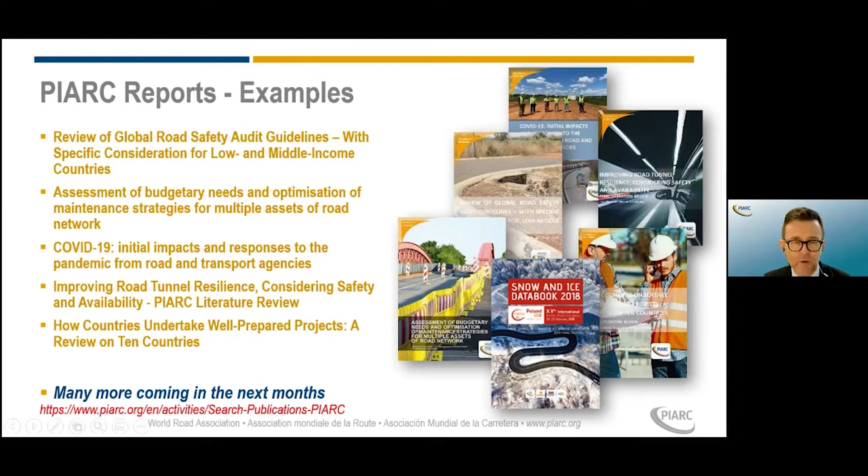All these reports are available from our website, and on average we publish about one report per month. That's an average, but it gives you an idea of how many reports you can find on our website. We also have online manuals.

These are actually websites focused on road safety and asset management, which I think could be interesting for today. They were updated in 2019 and are very easy to use—you can check them from your smartphone if you want. They're presented in a way that's easy to understand, and they're not just one report, but a gateway or portal to lots of nicely structured knowledge. There's also software such as HDM4 and QRAM to help manage the transportation of dangerous goods in tunnels.

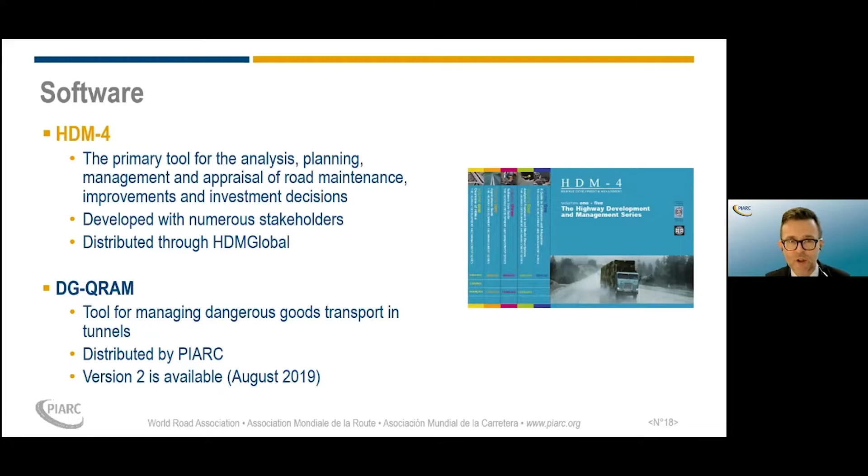This is also us—as you may see from our website, we have hundreds of reports available. That's a lot, but we need to continue, because roads and road transport keep improving. In many countries, roads represent about 80% of all inland transport, and they're really the gateway to remote or rural regions in particular. In urban areas, roads are needed for cars, buses, car sharing, electric vehicles—all these fashionable transportation modes mostly require roads.

This is why we at PIARC believe roads are key for equity, inclusivity, and accessibility. Roads are ready to support many sustainable and low-carbon developments, and roads are here to stay—they're not going to disappear. This is why we keep working to improve roads.

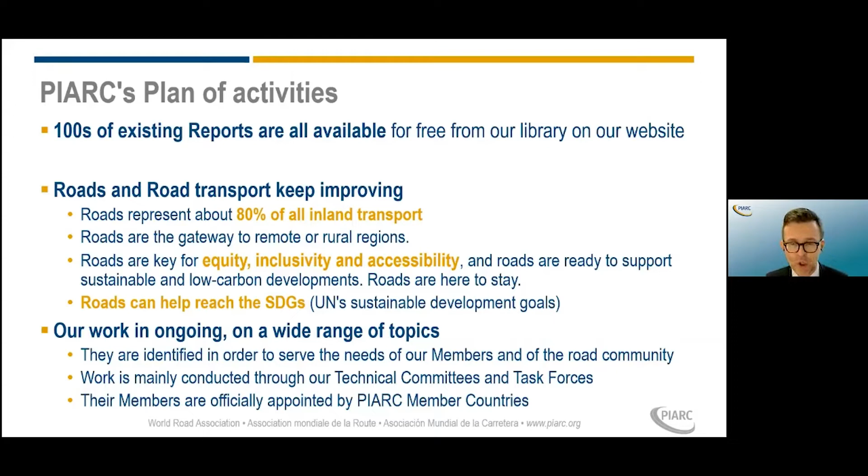We identify a large number of topics to serve the needs of our members and the road community. The work is conducted through our technical committees and task forces, as I was presenting, and the members of those task forces and committees are officially appointed by PIARC member countries. So we are very open, but very focused on serving the needs of our members, particularly our member governments. We develop a work plan covering four years; this plan is quite detailed, as you may see from our website, but it also reflects global trends, including trends that go beyond roads.

For the 2020 to 2023 period, including today, those cross-cutting issues include climate change and resilience, which are very relevant for the seminar today, tomorrow, and the day after, as well as road safety and innovation. This is the picture of our strategic plan. Winter service is here, but you may be interested in many of these other topics—maybe not today, but for a future seminar.

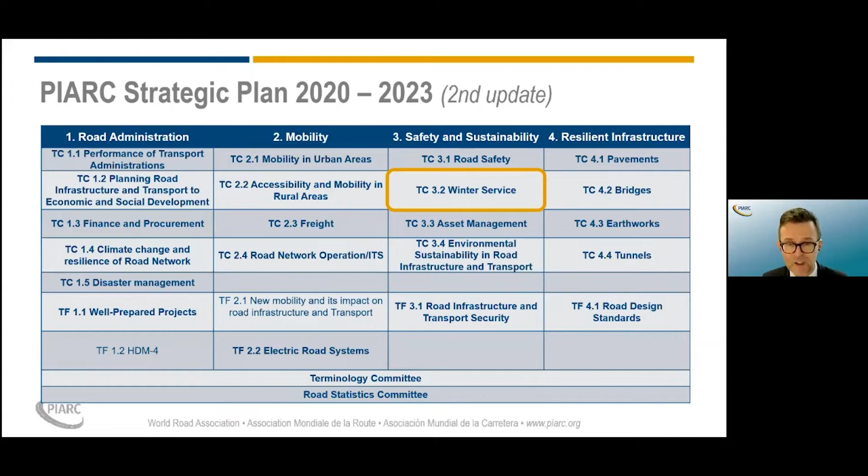So winter service is really well positioned together with asset management and road safety under the umbrella of safety and sustainability. This committee is led by a colleague, Nutz, who will be presenting as well and who is even moderating this seminar on PIARC's behalf. Together with his team, he's developing a large number of knowledge products and reports and organizing a congress, of course.

Some of us have asked PIARC to work on COVID. We did that. We published a report about a year ago on the impact on roads. The world, I would like to say after COVID, but it's continuing, the impact has been very significant. But we should not forget that we still have to address all societal challenges to reduce the carbon footprint of transportation, to help fight extreme poverty, to improve access and mobility for all, and to increase road safety. So we have to mix the impacts of COVID, such as digitalization, with all these policy objectives, and we help our member countries make policy choices that combine all these aims.

This is why it's important to continue sharing information. What you are working on in Ukraine is probably very interesting for Argentina as well, and vice versa. So this is why PIARC exists, to help you colleagues meet and share your ideas, maybe share your issues or problems as well.

We organize lots of events, such as today's event. We have many other planned, as you can see. Just last week, we organized a seminar on climate change adaptation with Uganda. In March, we will organize another one on rural areas with Paraguay. Also some conferences, such as the Symposium on Pavement Characteristics and the Conference on Tunnels Operations and Safety, which will take place in September and October next year. And a bit later, further down in 2023, the 27th World Road Congress, which will take place in Prague in the Czech Republic. I hope we will see lots of colleagues from Ukraine there.

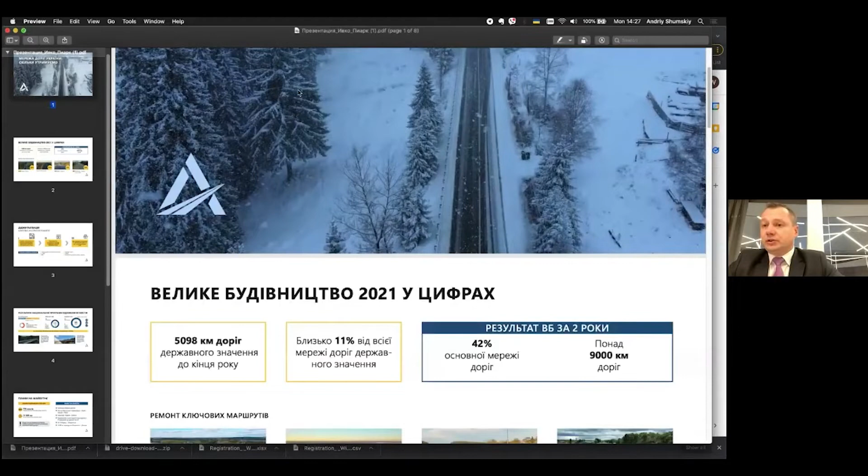With regard to maintenance in the winter, we are able to see the presentation. So the infrastructural issue is one of the biggest areas of the economy in Ukraine, and the well-being of many people depends on it, as well as the competitiveness of the country in general at the external markets. So today I will be able to share with you the way we operate, where we're moving, and what are the plans, and what has been done over the last year and this year so far.

So you see the slide. Ukraine has...

Ukraine has three different types of roads: municipal roads, state roads, and local roads. The state roads has about 170,000 km, 47,000 of those are international roads and national regional roads and territorial roads. So we have 123,000 km of roads of local importance, and we have regional and village roads.

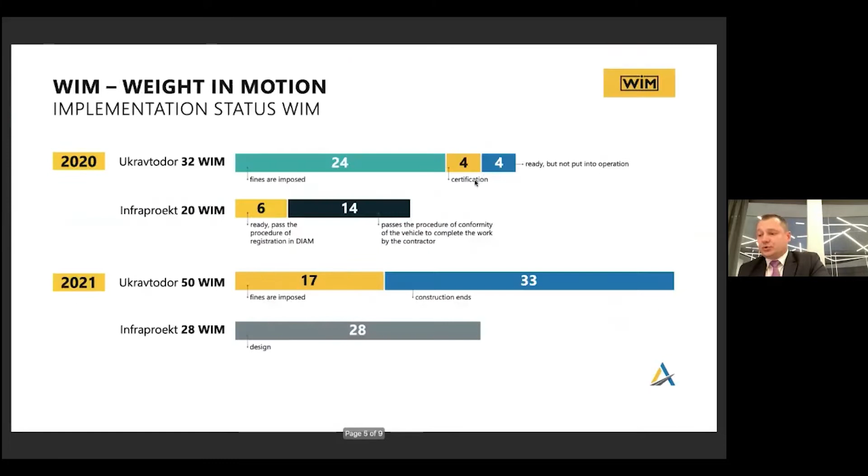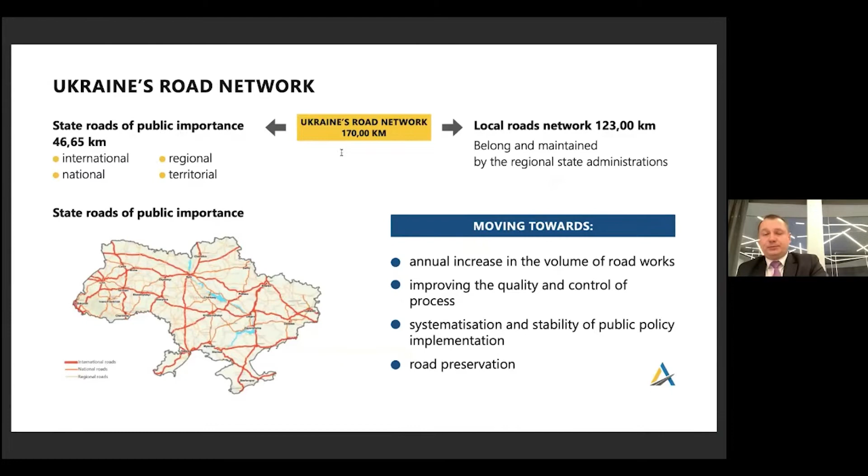Over the last year, we were able to restore 213 artificial structures in 55 [locations]. This year, we had plans to restore 160 artificial structures, their restorations and construction. We're talking about bridges and roadways.

So far, we were able to build 300 of those, 50 within the framework of the maintenance program and 250 according to the national program. The bridges that were built include the bridge through the Luchka River and the road bridge to N01 road.

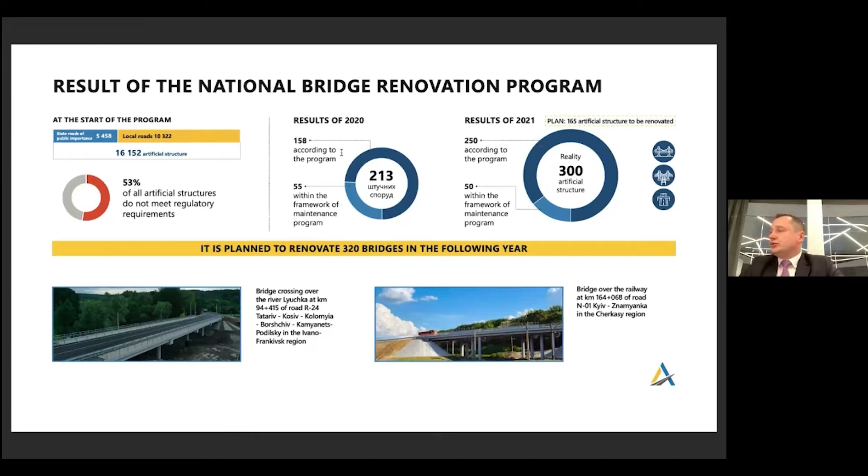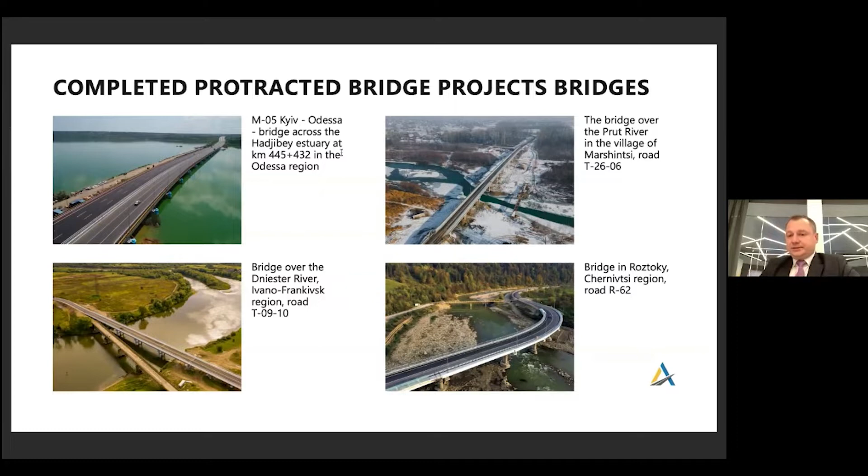Next slide, please. For the future, these are the plans. We hope for the next several years to complete 770 new bridges and 15,000 kilometers of motor roads. Our primary direction will be working with the Kiev Ring Road.

Last week, the procedure for bidding was announced, so we're in the process of bidding. When the subcontractor wins the bidding procedure, we will move toward construction of the ring road for the Kiev area.

Also the commercial road, 280 kilometers, Krakovets-Brody-Rivne. The substantiation documentation is being prepared and will be filed by the end of the year. Then we'll have 2 more months for approval, and this will be a concession road planned to launch in the nearest future. Kharkiv-Dnipro.

This will be a very important connection between 2 major cities. Also construction for M24 to lead to the border with Hungary, and then M14 Odessa-Mariupol. And then we'll continue this road to the places where it's not reaching out yet.

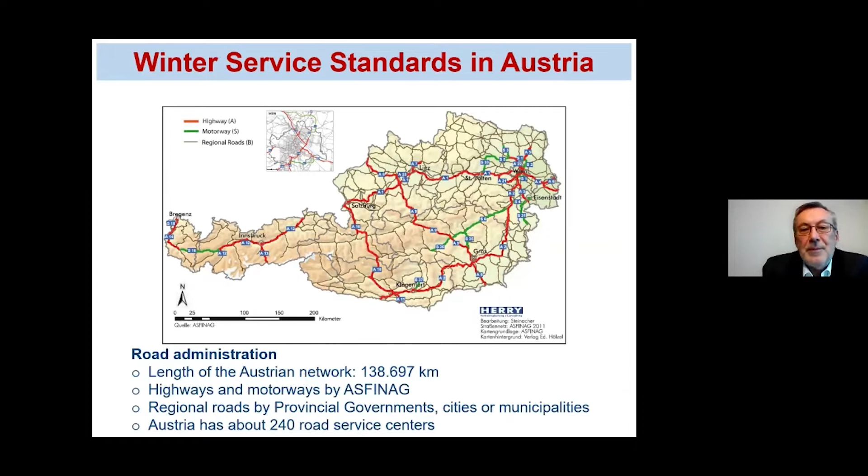You can see the road network here. The largest network is municipal roads, and the smaller but higher-category network is highways and motorways managed by ASFINAG. All of these are salt spreading routes for winter service. For other routes, it depends on the amount of traffic.

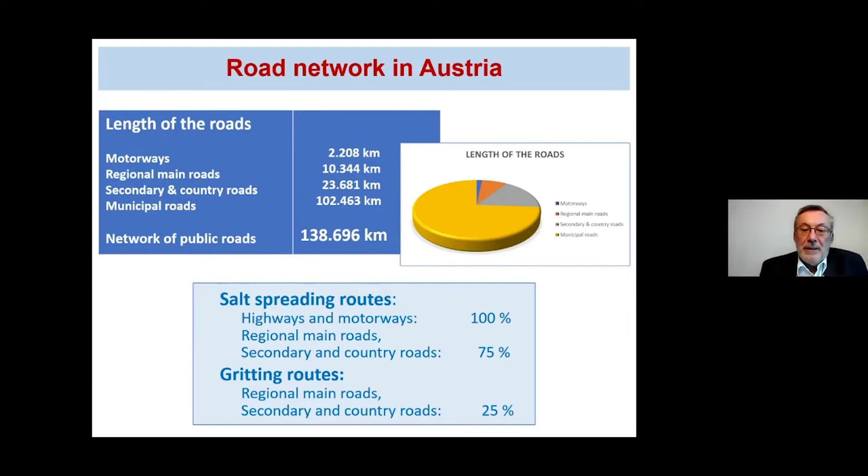Gritting material is also used in Austria. As I said, motorways and federal highways are administered and operated by ASFINAG, a private organization that earns money from road use. The national roads are administered by the Austrian federal states—we have 9 Austrian federal states—and they are responsible for the road network in their state. The municipality roads are administered by the cities or municipalities themselves.

The legal requirements for roads in Austria: we have the Austrian General Civil Law, the ABGB. There is paragraph 1319a, liability of the keeper of the road, and this applies for both summer and winter. If a person is injured or something is damaged because of a defective condition of a road, the person responsible for the proper condition is liable. This means we have to do winter service, and we are responsible—whoever is the owner responsible for this road or way.

Then we have in the road traffic regulation a paragraph on duties of the residents. Residents also have to do winter service in front of their houses. It says that in the local area, residents must clear the sidewalk along the house from 6 o'clock in the morning to 10 o'clock in the evening and grit it in case of icy conditions. They have to do this work themselves, or if they can't, make a contract with someone else who does it. If there is no sidewalk, the roadside must be cleaned and gritted in a width of 1 meter in front of the house. So residents also have to do winter service.

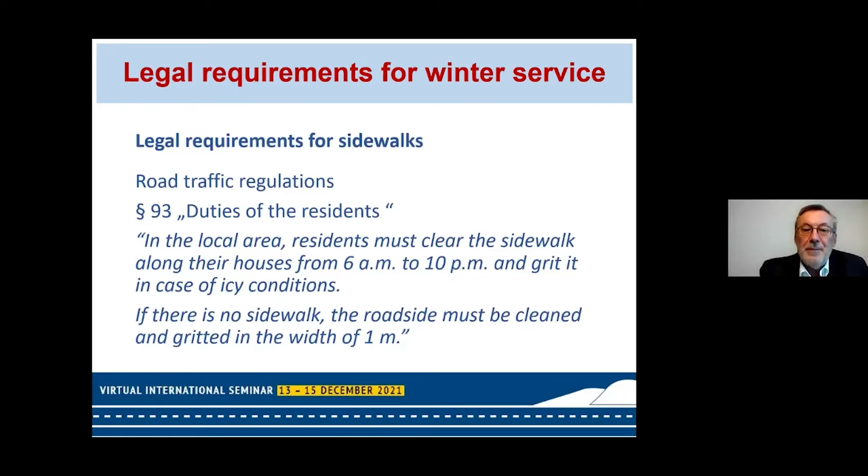Definitively, what is to be done for winter service? We have technical standards—papers done by the Austrian Winter Research Committee, where Peter and I work in this group. There are general definitions, and the main document is on snow clearing and gritting, explaining how to organize winter service, what to do with snow clearing, what to do with gritting, and what personnel tasks are involved. There's also a separate document for snow fences in regions with heavy snow drifts, a technical standard for a road condition information system, and a paper about minimizing environmental impacts.

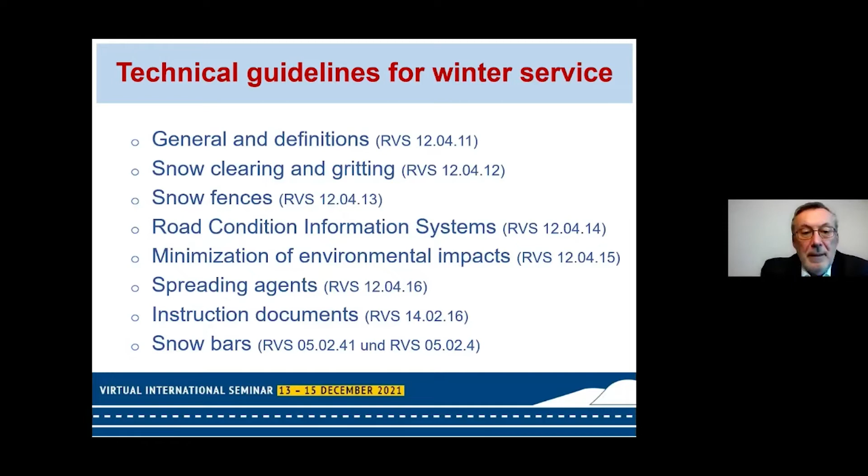This is adapted to the latest research, especially regarding environmental impacts from de-icing agents. There's a paper with standards for spreading agents, which includes gritting material and de-icing agents, incorporating the relevant European standard. There's also an instruction document for new people introduced to winter service, and two small papers about snow bars—how they are built and how they must stand along the road.

What are the winter service standards in Austria? For highways and country roads we have 4 different categories, depending on the amount of traffic. The highest category A is for highways and express roads, where winter service must be done around the clock.

The cycle time is a maximum of 3 hours. That means within a maximum of 3 hours, the snow blower or spreading car must be ready to start the next round. That's a minimum standard.

We have highways with a cycle time of about 40 minutes, and high-level country roads with about 5,000 vehicles per day (ADT) at a cycle time of 5 hours, with winter service done from about 4 o'clock in the morning to 10 o'clock in the evening. That's the minimum standard, and whoever is responsible for winter service has the opportunity to order a winter service around the clock in such situations.

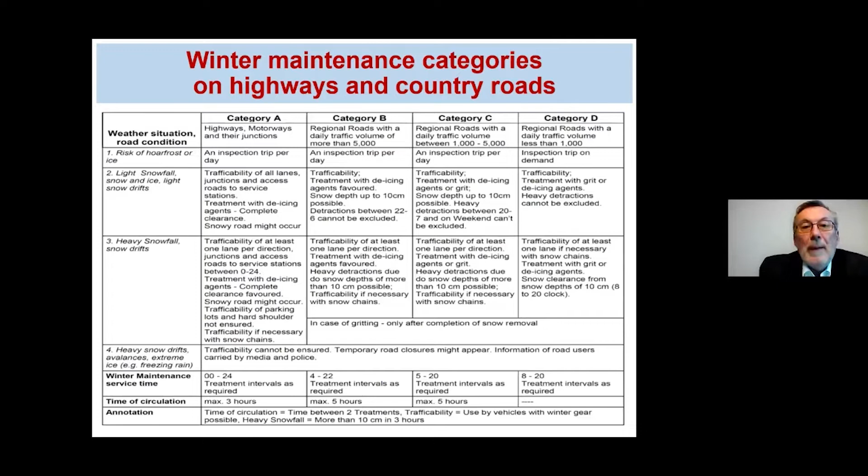This table is written down to show what they have to do in category A. The left column shows the weather situation: light snowfall, heavy snowfall, snowdrift, avalanches, extreme ice, and freezing rain. It shows what the winter service station has to do, and also the winter maintenance cycle time is inside there. That's all for highways and country roads.

For urban areas, for cities and municipalities, we have standards with 7 priorities. Priority 1 is the highest, for inner city main roads, going down to priorities 4 and 5 for cycling lanes, which also have winter service done. The last ones are priority 6 for sidewalks, and priority 7 for parking areas.

Also for different weather situations, the standards are written down for what the winter maintenance station has to do as a minimum in cases of slight snowfall, heavy snowfall, and so on.

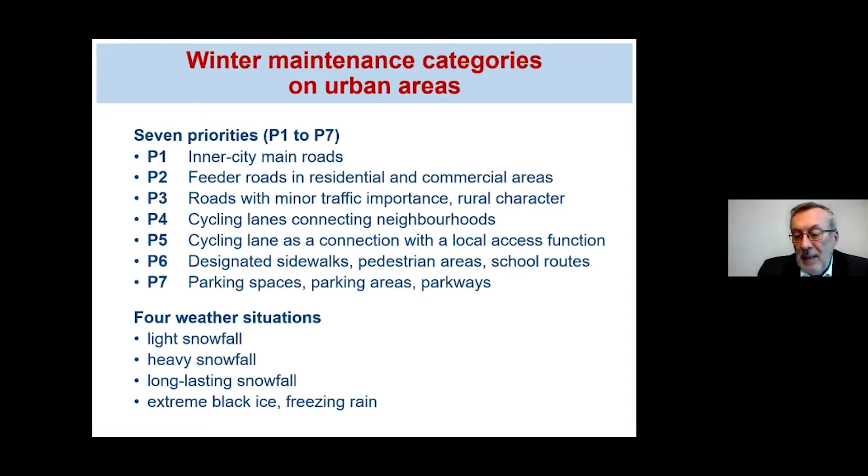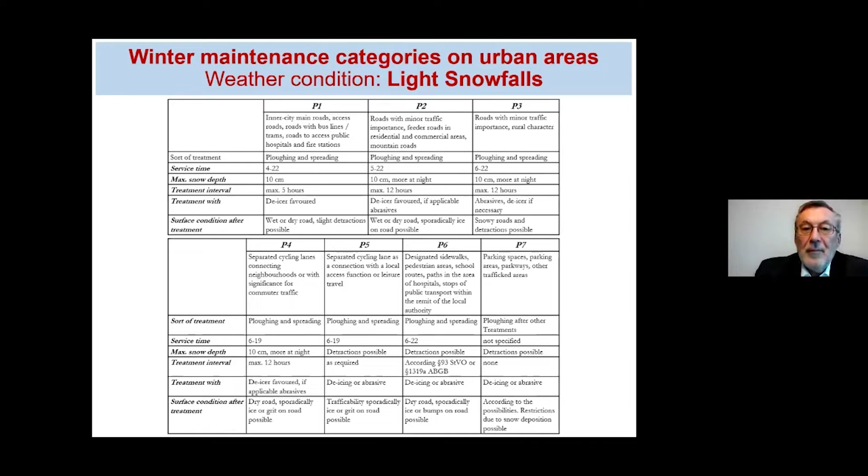In Austria, we started 10-14 years ago with winter service research projects. The first was to optimize pre-wetting salt application. The pre-wetted salting standard was FS30, 30% brine and 70% dry salt.

We asked in Austria what we could do with other brine amounts, like 50% or 70%, and had a research project with the Technical University of Vienna, where Peter Nutz works and also worked on this research project. We found new spreading methods with other amounts of brine, and wrote new spreading sheets.

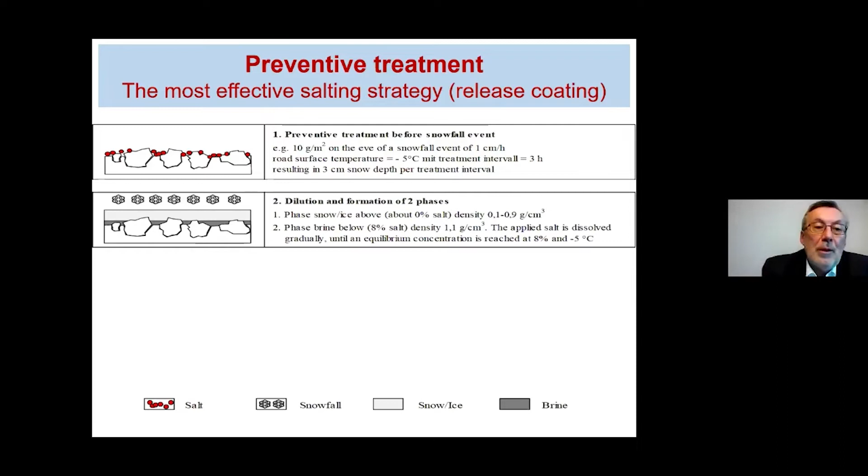They built a release film on the road surface so the snow cannot freeze on the road surface, and you can work well with a snowplow. Here's the next picture.

You build the film on the road surface, and you can clean it and spray it again, and do that as long as the snow is falling.

Because of this research project, our spreading machines were changed, because we need more brine tanks on our trucks. The first step was additional brine tanks, because we spread more brine and less dry salt, since we see that the residual salt on the road surface is higher if you use more brine.

In the picture, on the left side down, you can see the spreading pattern with only brine spreading on the road surface. It's possible on country roads, it's no problem, you need no nozzles.

We can reduce salt consumption: FS50, called 50% brine and 50% dry salt, to FS60 with 60% brine and 40% dry salt for 20% reduction, to FS70 with 70% brine and 30% dry salt for 40% reduced salt consumption, compared to the former standard FS30 with 30% brine.

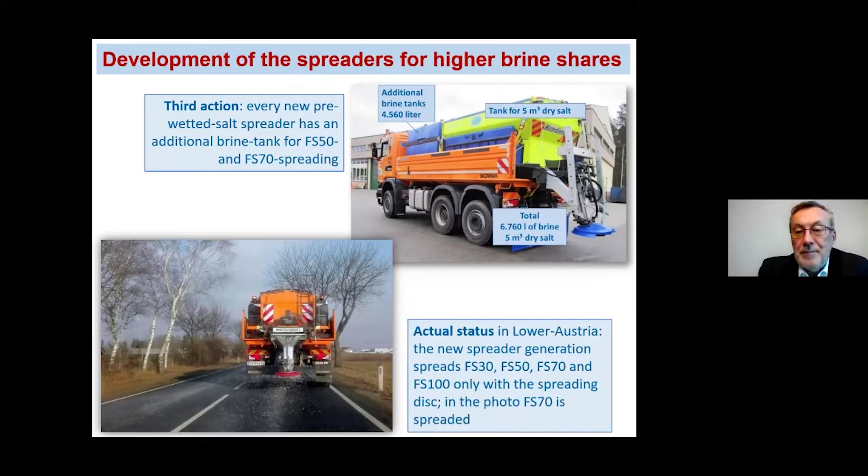In Austria, we have also compared salt spreading especially for this chart. You can see how much salt is used by an organization per lane kilometer on a salt spreading day, and how much they use. We compare the 9 different federal states and also ASFINAG, the private organization responsible for the highways and motorways, showing how much tons per lane kilometer they use.

It's a good instrument to optimize your winter service. When we discuss what you did, we also compare how much brine the different organizations use. And within the federal states, at the maintenance stations, we have charts comparing different maintenance stations in similar climatic conditions.

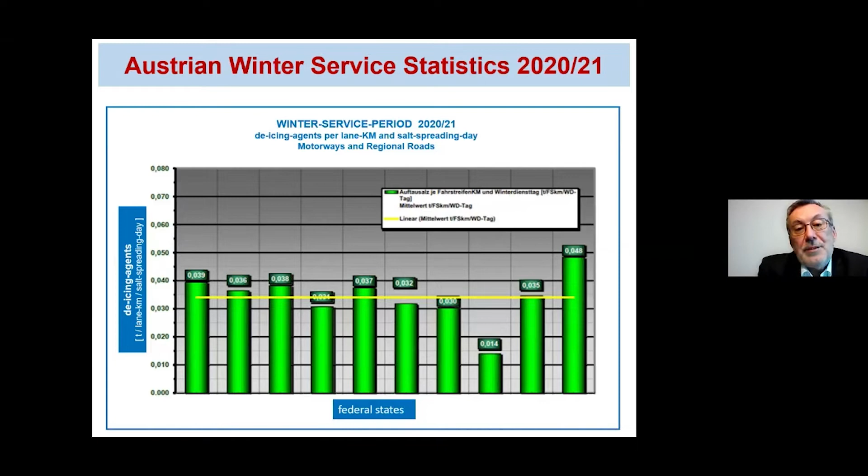So thank you, I was able to present the standards in Austria, the rules for winter service within Austria, and what we are working on with research projects to optimize our winter service.

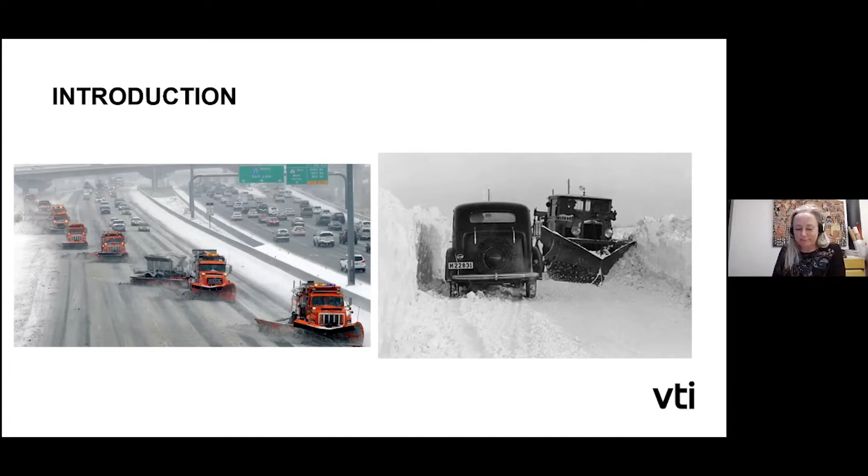Nowadays it looks a little bit more like this, this is from the US where the big parallel cleaning goes on. And then we have digitalization, but we still don't have apps that can do the maintenance for us, though they could actually be of good help.

It started out in the 70s with the road weather information system, with stations around the roads placed in cold spots or more extreme positions. They were measuring temperature, wind and precipitation, and the operation manager had to call out to each station to see what weather was at the moment.

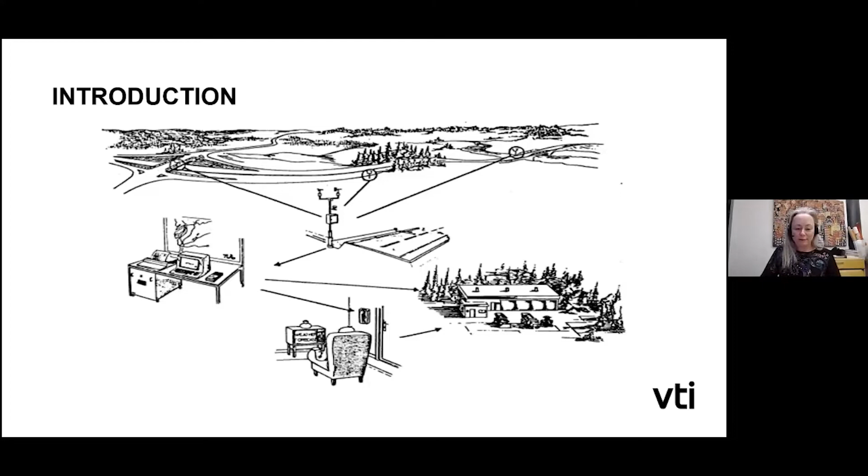Now he can get all this information back to his phone or computer in the office, and he has a lot of different other sources to use to get weather forecasts, temperature, precipitation, road conditions, friction measurements, and everything you can wish for. It's there, you just need to organize it in a good way.

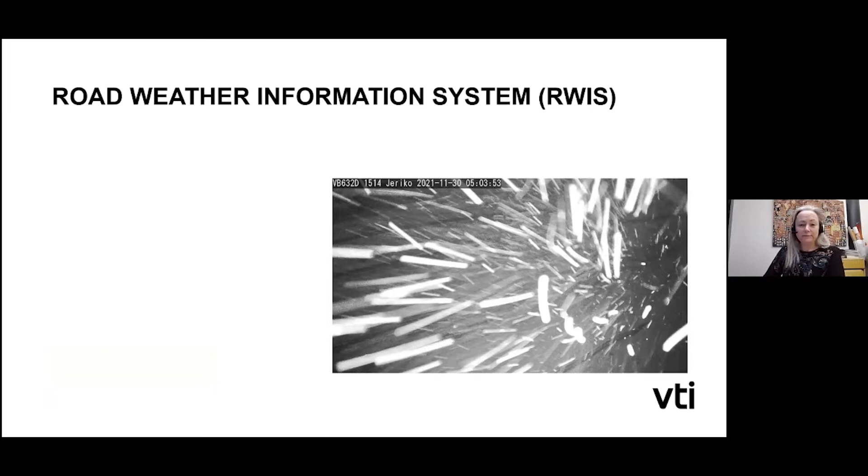We also have connected cars today that can tell the operators or drivers coming behind you warnings if the road is slippery ahead.

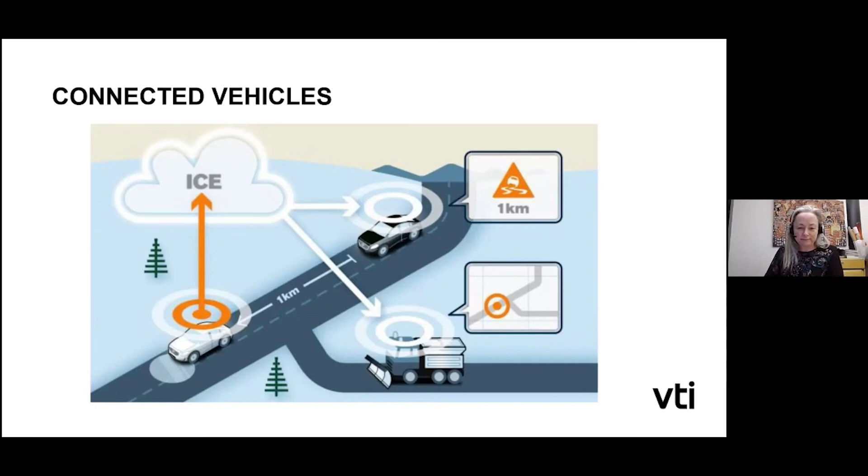This vehicle data can be used both to check if the actions have been done the proper way, for the NRAs to check it up, or for the forecasters to use as help for self-control when they do the forecasts for coming hours. And the forecasts go to decision support systems, and the contractors can use it

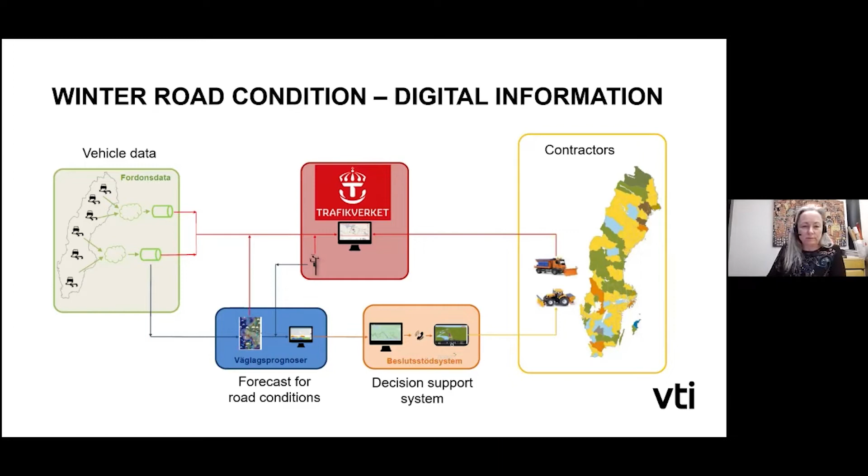to make good prognosis on when it's time to go out and do the actions on the road. The project I was involved in was called Dynamic Forecast Controlled Winter Road Maintenance. We took all different kinds of data and put it together, and I'm going to tell you a little bit about it.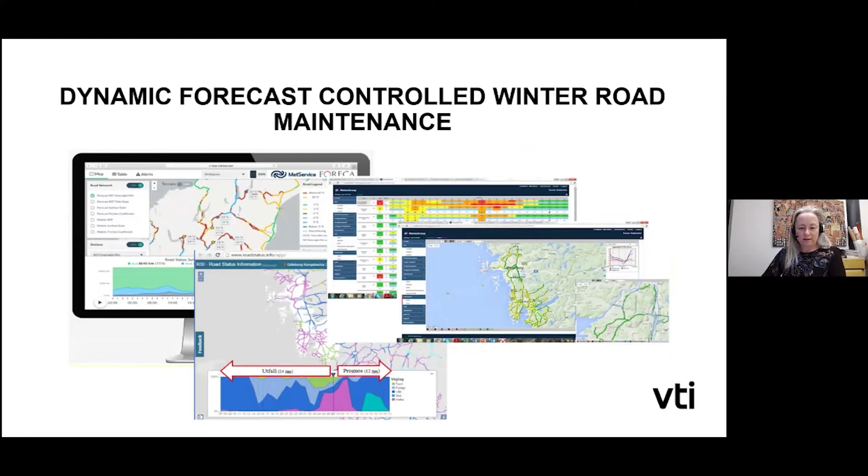We have several road weather forecast services that can provide qualified support for decision makers today. They can easily see forecasts for road conditions, temperature, and precipitation. The service provides a dynamic road condition forecast, and in some cases it even gives proposals for the different actions that's needed on the road.

The main advantage with these systems is that the forecast clearly can show you which part of the road needs to be addressed, and where you actually need the most salt, or if salt is already there from the last time you were out and did your action.

So if we have all these systems to help us, how can we make it easier for the driver and get all this information out to the person driving the truck and doing the salt spreading?

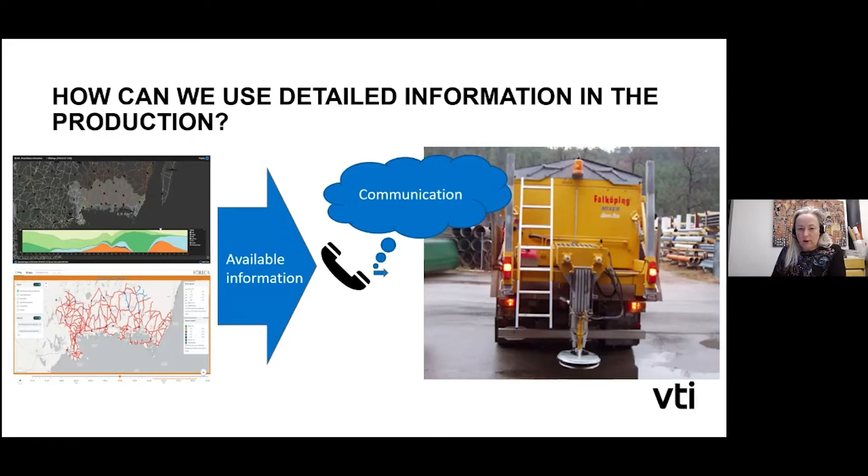This project mostly took care of preventative salting. Plowing and all those things is to come in the future, I hope.

So why do we want to make it dynamic optimization? We want to do it because we can have different weather in different sections of the road, and if we can optimize this, it's gonna get us more money in the end. We're gonna save money in the end.

And today we have a labor market that's very flexible. We have short contracts, increased delivery controls, personnel retiring, and it's quite difficult to get the personnel to work in winter maintenance.

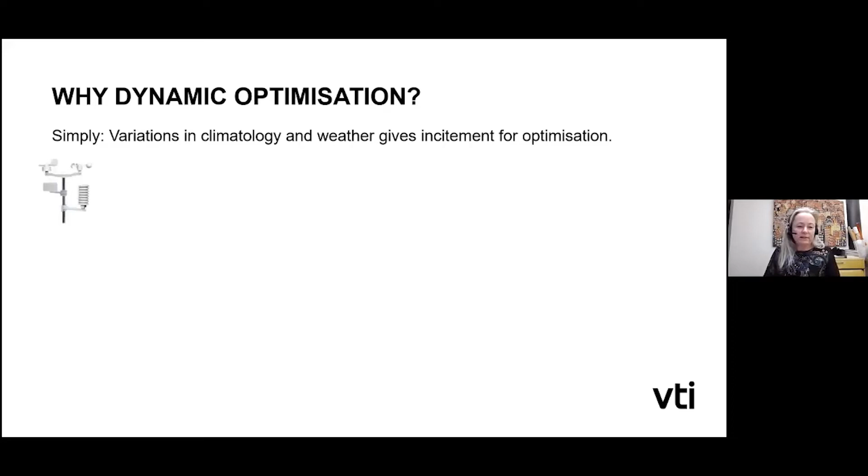So with these new systems, we can actually take the road weather station data, get a bigger picture of it and see how the weather is going to be in 4 hours or so, and plan ahead in a different way.

If this light gray area is the area you need to treat, there are lots of bigger and smaller roads, just as Josef told in his presentation, with different types of roads requiring different kinds of treatments.

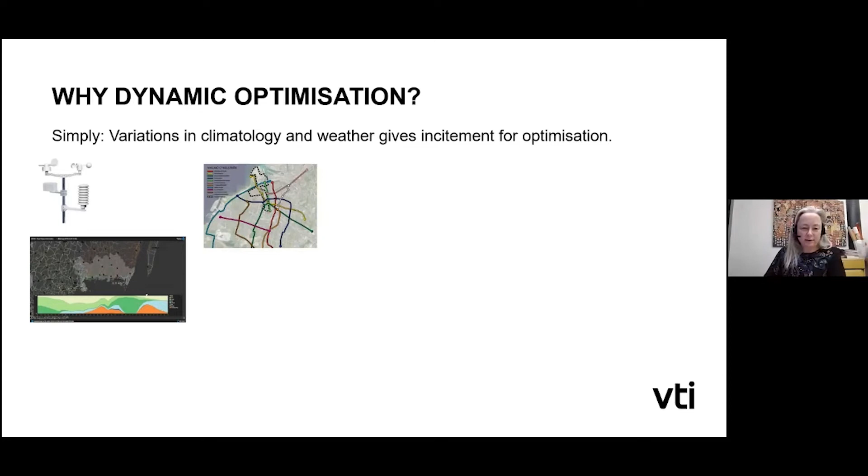If we have a route optimization of this, it could be looking like this, with different cars driving in different colors. Some sections of the road are really complicated to drive.

But if we take all this and put it together, then we know, okay, I have the need of 5 cars or something, then I call them out. I don't have to call them one by one like you used to.

You can use the computer, and the computer calls or sends them a text asking, would you do this route? Can you go out and do your work in an hour? And the driver can say, yes, I'm fine, I'll do that. Then he gets the navigation route sent to his truck, and he just goes to the truck, starts driving, and gets instructions.

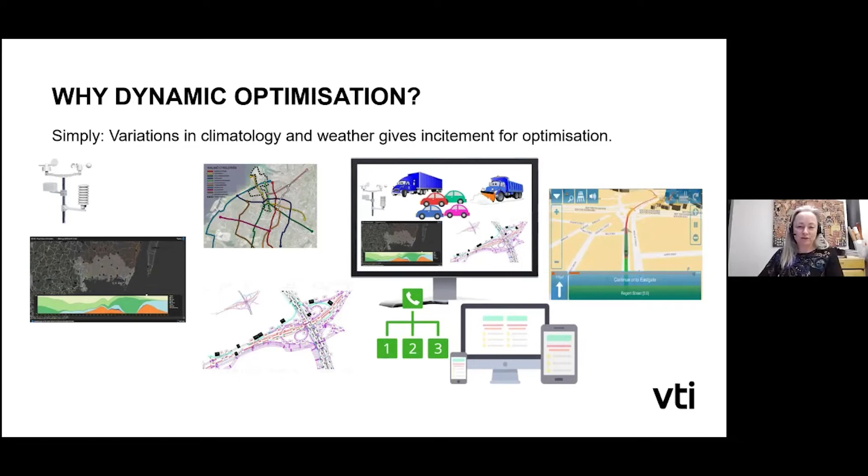The aim of the project was to make the decision making easier for the people taking decisions, integrate data from the weather forecast service into existing GPS management and monitoring systems, reduce the error margin regarding communication between performer and the winter maintenance contractor, and get more productive winter road maintenance with dynamic road conditions through integration and automation, and in the end, a better road.

The project has been in 5 phases so far. The first phase was to try to see if it actually worked to do like we thought it should be done. And the second phase was to implement the project and try to adapt it in the real world.

We started with trying to make the call out, then the call out with a static route. The third thing we did was the call out with navigation on the static route, and then finally, call out with navigation and dynamic route.

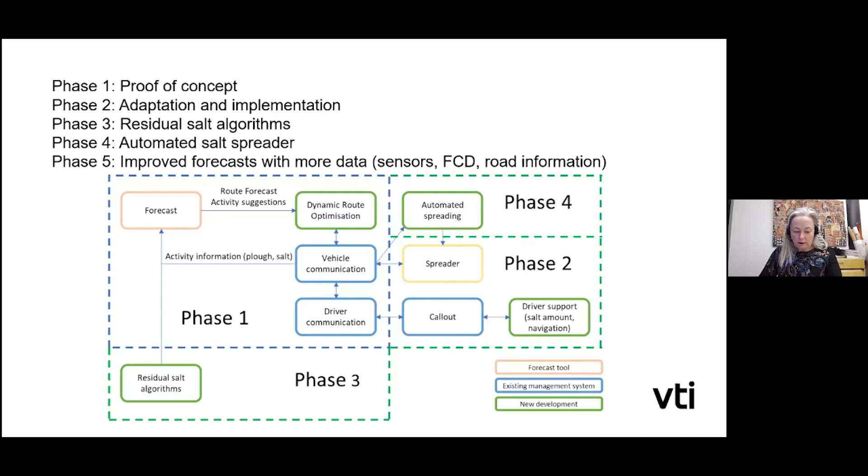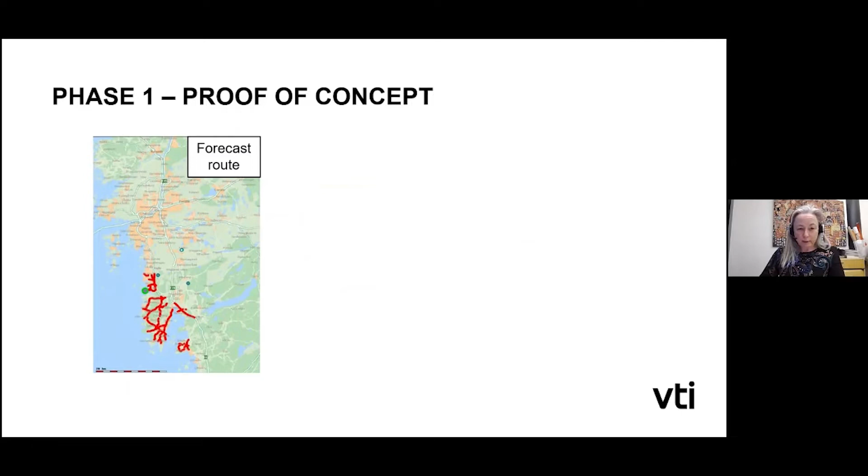This is from phase 1, where we had the forecast. The red is where it should be, where the prognosis says it's going to be slippery, you need salt. We did an optimization with 2 vehicles and got this example.

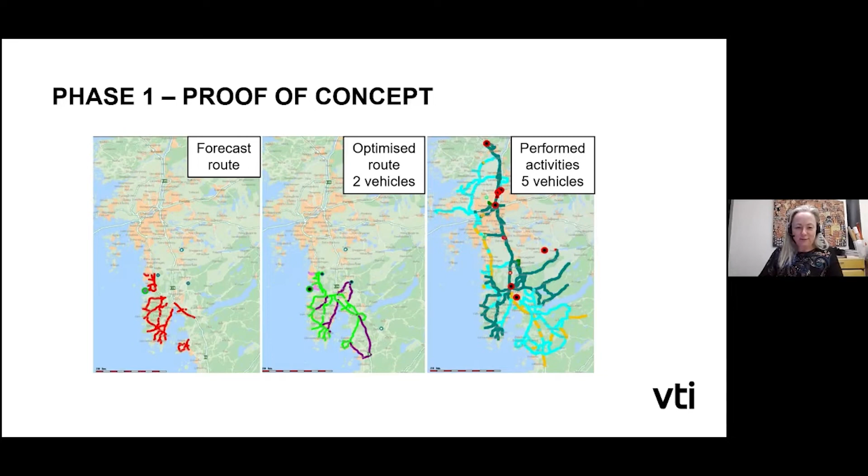So it could have been a lot cheaper than it actually became for the manager this day. But since he didn't trust our prognosis, he did it the way he usually does. Better to be safe than sorry.

And we saw that the concept was working. Calculated reductions in machine hours, reduction of salt and emissions by 15 to 25% throughout the winter season.

This was in 2019, I think. Then last winter we did a verification in a test area, and it actually worked. The numbers were correct when we did it in real conditions.

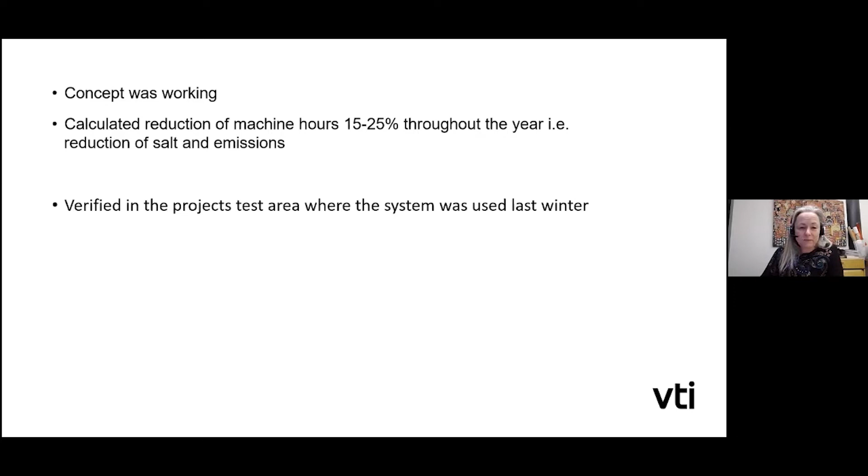Phase 2, here we tried the whole chain from the forecast with the optimizations, with the call out, with the driver saying yes or no. He had a choice. If he said no, we called out another driver. We sent the route to the truck, and he went out on his shift and followed the map he got.

All the functions were working, and the only problem was how good the forecasts are in the beginning. Because if the forecasts aren't good, it could be trouble down the road.

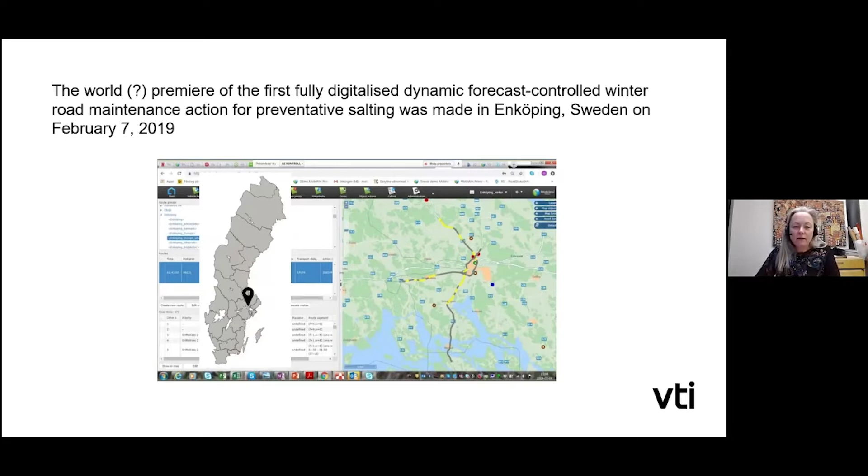For the last few winters, we also did phase 3 with residual salt, because if there's already a lot of salt left on the road, we don't need to go out and do additional salting. This graph shows wet, damp, and dry road, and how many cars the salt can withstand.

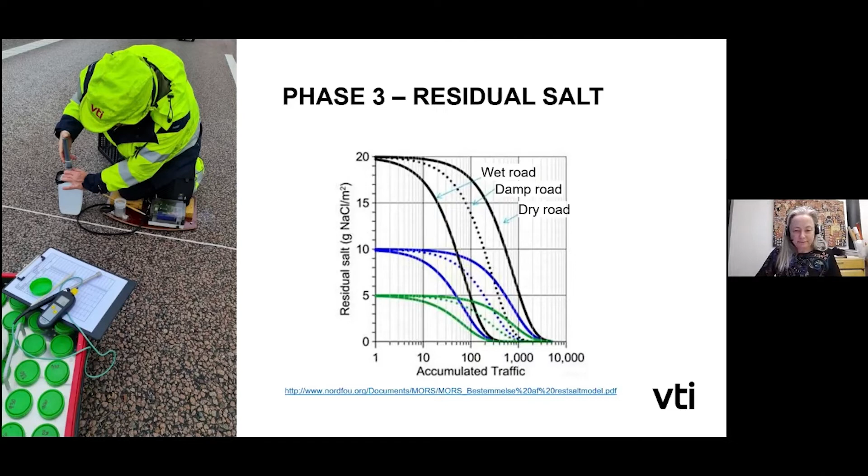We did measurement of salt at test site E18. That's a test area on a highway. We have sensors and road weather stations, and we can measure almost everything in and above the road.

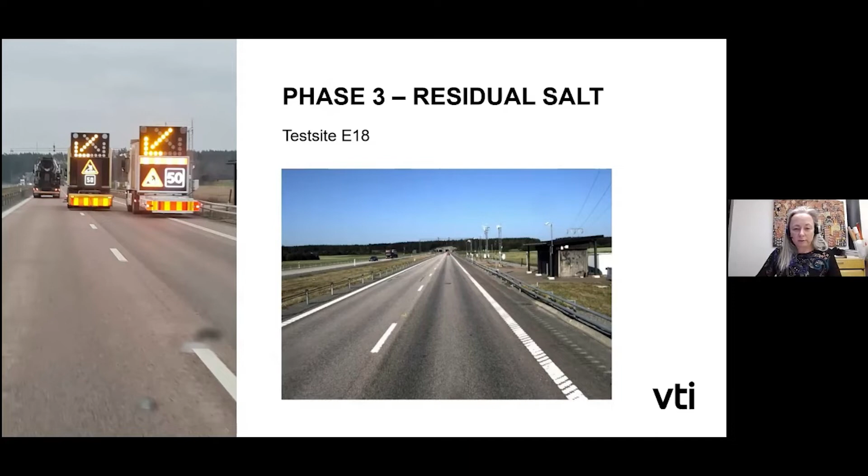Here's my colleague doing salt samples, starting from the edge of the road and throughout both lanes. This was done in November last year.

The day before we were here, there was no precipitation. At the moment he sat there, there was 4 degrees in the air and 6 degrees on the road surface. They had salted in the morning before we arrived.

We used the VTI wet salt sampler, where we have a syringe with a known amount of distilled water. We put it in a cylinder against the road, and the salt dissolves, and we can measure the conductivity in the water. We also take a sample back to the lab to verify our measurements, so we actually measure the correct amount.

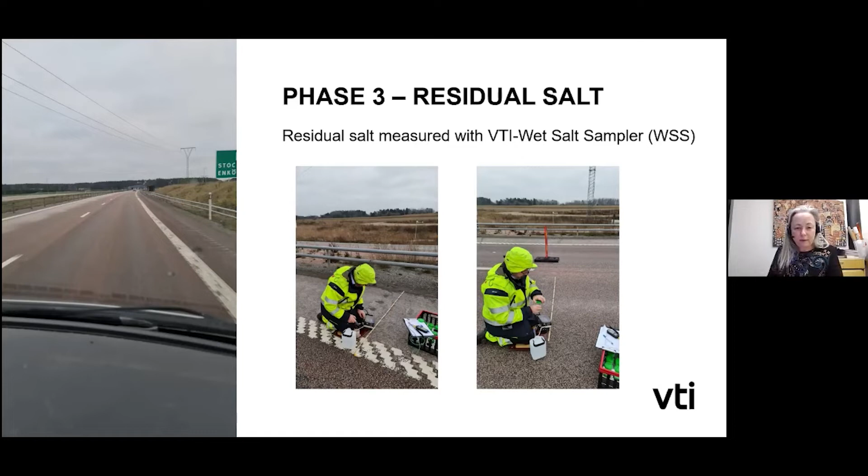This graph is from one of the road weather stations. At 7:15 we salted 12 grams per square meter, so about here, and then around here somewhere we measured salt just next to it. We measured 1.5, I think.

1.5, and the sensor said 0.3. So a little bit of difference, but since we dissolve all the salt on the road, and the sensor can only feel the amount of salt on the sensor itself, and it needs to be in solution, that's the difference between what we measured and what the sensor is measuring. The salt was gone in 4 hours, which is equivalent to what we thought it should be.

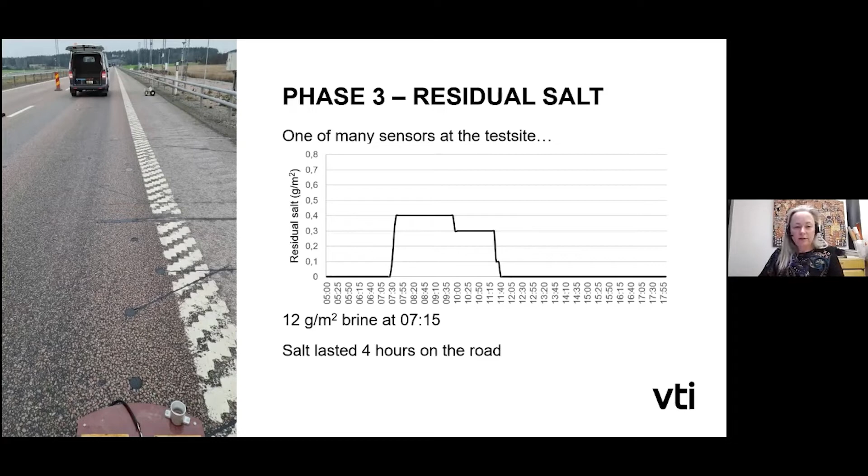We also did modeling with the residual salt model, which was a collaboration with Nordic companies in residual salt a few years ago.

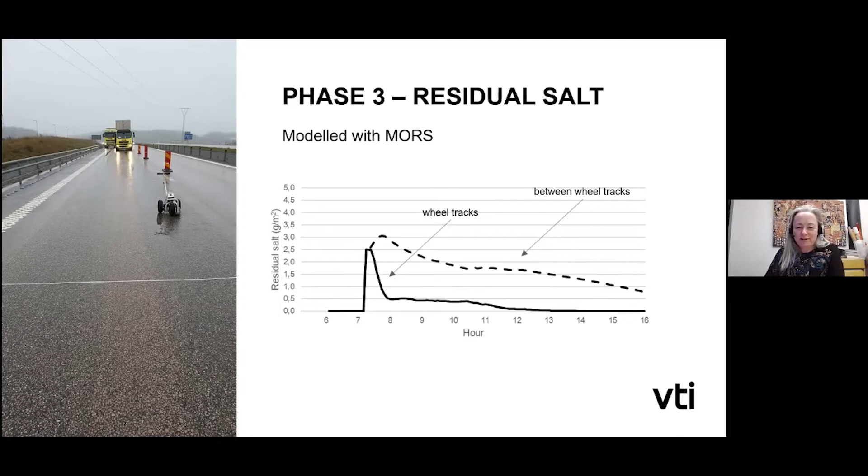I'm soon finished, I see time is running out. Salt spreading - we tried to actually do steering files for the salt spreader as well in phase 4. And it's actually working. When the driver gets his map, the car also gets his information, so the salt truck is spreading salt where it should spread more, less, or nothing. All the driver has to do is drive.

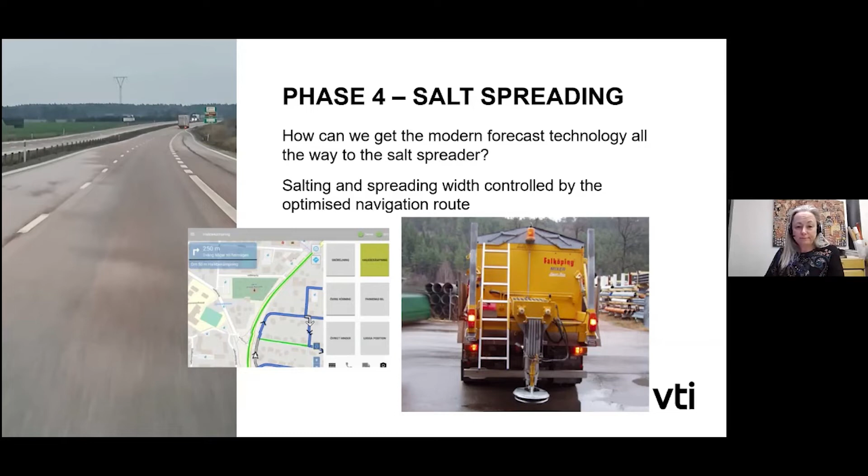And this is actually going to be tested this winter in real conditions, and also this winter will continue with improved forecasts, where the forecasters can get access to more data and do their better road weather prognosis.

Conclusion of this is that this project can be a contribution to decrease salt use, decrease emissions and air pollution, reduce at least a little bit the stress for the drivers, and decrease travel times for the road users.

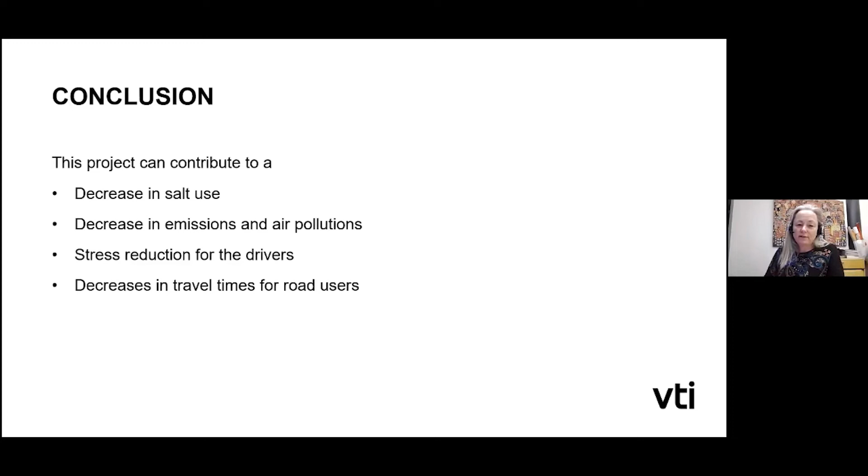We were a few companies in this, and a few contributors of money for fundings.

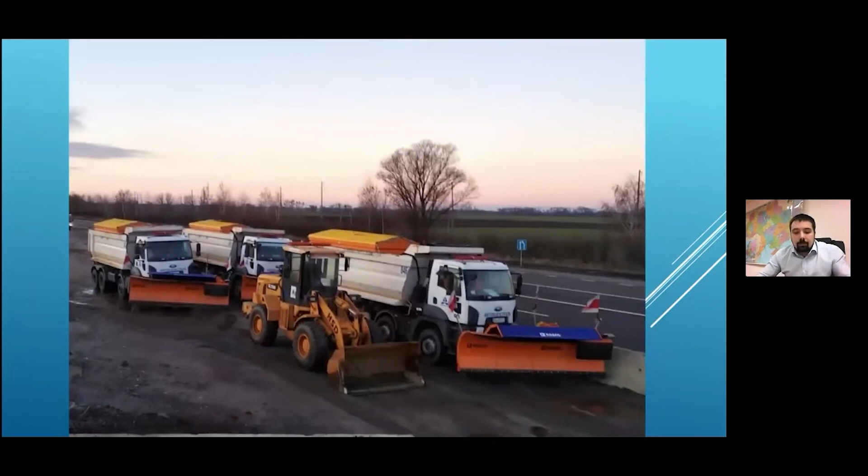Maintenance is a big complex of works. During the winter, it's road cleaning, salting, snow plowing, and implementation of passive road snow blocking techniques.

Using snow plows is very effective to prevent snow buildup. In case of ignoring these works, the snow can build up, and in order to alleviate the snow buildup we need to use rotor snow plows. So we use the whole range of necessary techniques and machinery.

Snow plows are used together with rotor snow plows. In order to clean the road, we also use excavators and loading machinery. All this machinery is most effective at bus stops, rest platforms, U-turns, and also at parking lots.

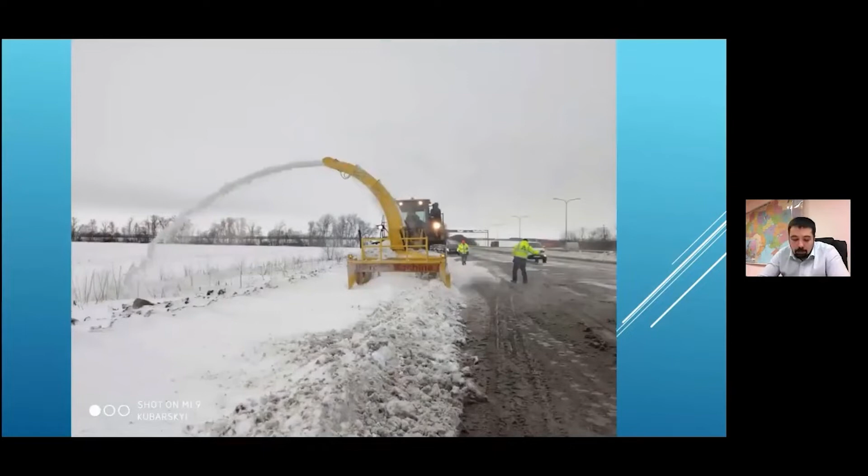During the spring and warmer season, we maintain the road cracks and potholes. We fix the fencing, install the road signs, and may perform other road works.

During the winter time, our Maestral Pivden company is performing all the emergency road maintenance.

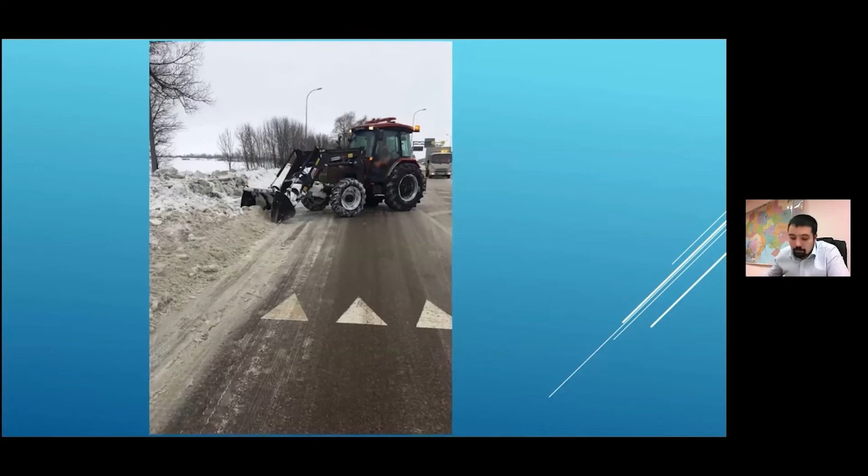We're able to use cold concrete of up to 5 centimeters thick. If necessary, it's done in 2 layers. If we have a steamroller, this compaction can be done in one take.

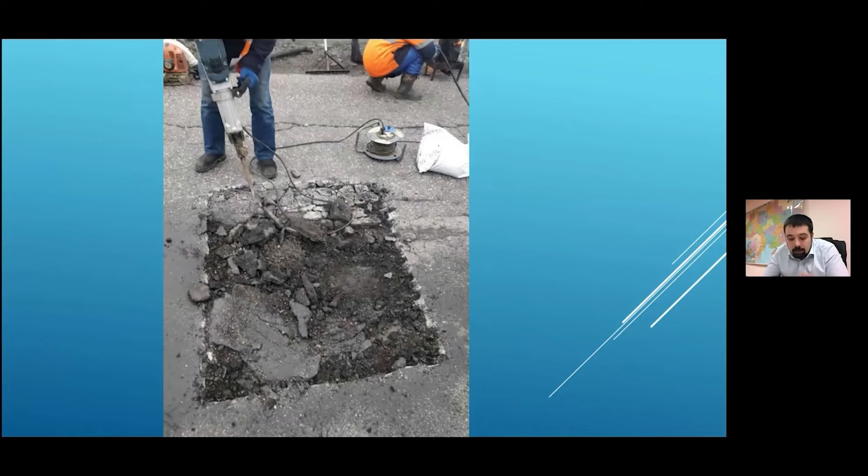The recommended footage is at least 2 square meters. The edges of the prepared block have sharp, deep edges, and we also use the technology of liquid asphalt concrete.

This is a new material used with pouring techniques with bitumen and different grade rock. Asphalt is transported in mixers like these that provide for mixing of the necessary components in the necessary proportions. This is a very liquid material, flowing at 220 centigrade.

In the process of application, the material becomes solid and very resistant to any physical impact. We use modern day materials and methods to fight ice.

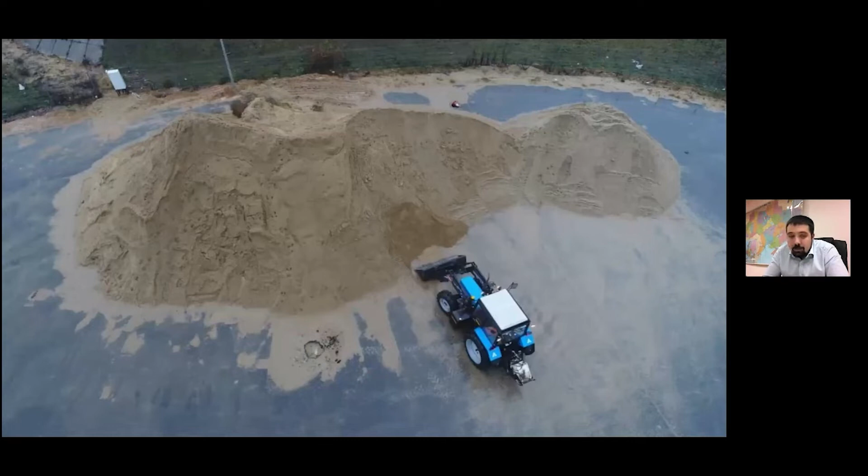We transport salt, so use of salt technologies compared to saline solutions in mix will be able to help us save on time and save on costs, and will provide for better transportation regardless of the weather conditions.

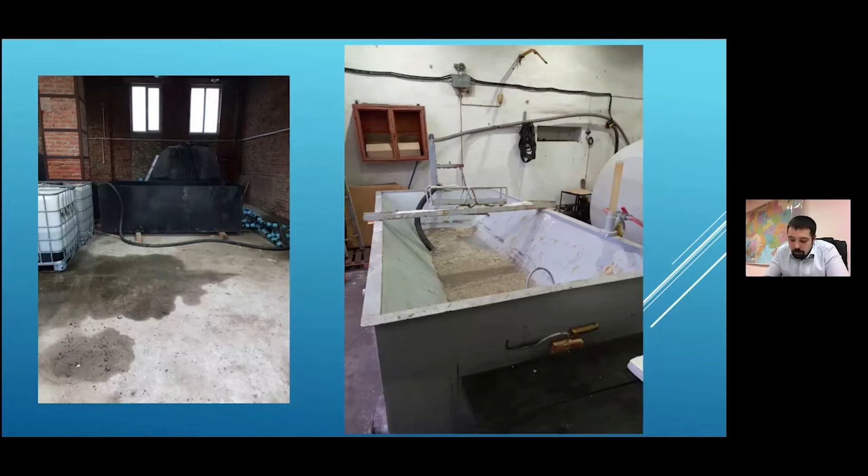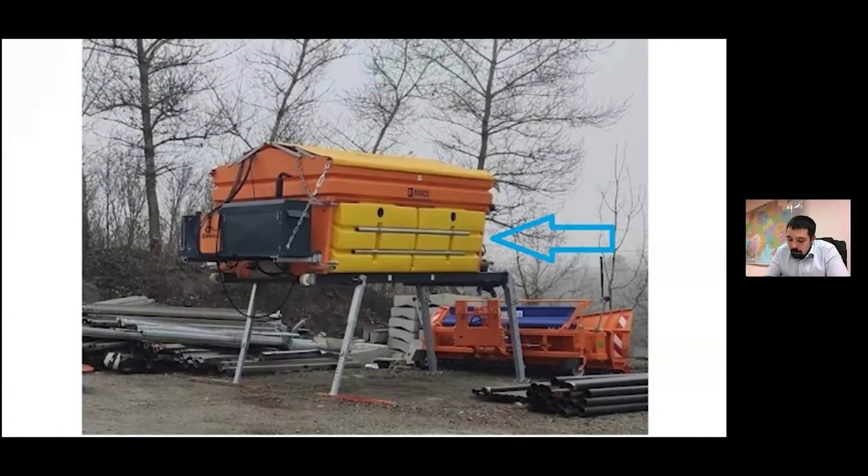We have implemented the technology of treatment together with reagents on the basis of saline solutions. This technology is used in the company. Additional equipment is used both for preparation and for spreading. The saline solution is prepared by mixing with water into a thick solution, so it is not freezing under -16 centigrade.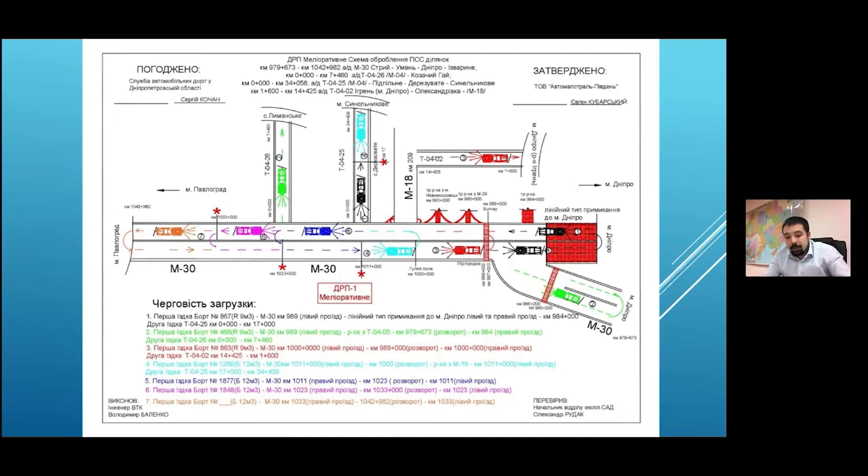The wet salt is heavier, and its resistance to wind is improved. The wet salt is also very efficient during dry snow and lower temperatures.

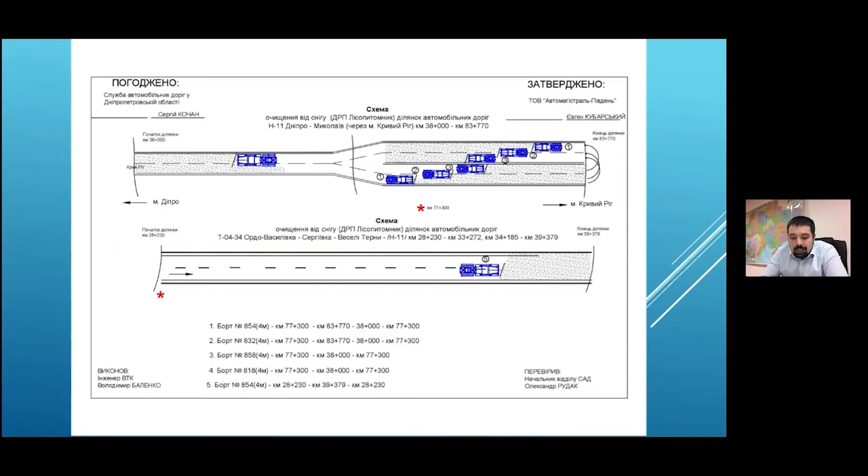All the equipment used is designated to specific roads and parts of roads, and they are equipped with GPS trackers. Our dispatch services, located in Kiev region and Dnipropetrovsk region, are able to track and monitor the situation on the roads. The company engineers have developed and agreed the technology layouts, and copies of these technological maps are issued to drivers and mechanics.

We perform ongoing training of the road service supervisors. We train personnel to act in different emergency situations. It's very important to have a team that knows the different technology processes used, and that acts responsibly in extreme situations of winter weather. So it's very important for our company. Thank you for your attention.

Thank you very much. It was really interesting, and it was really good to see a lot of snow that you've been plowing through on the roads. Really impressive pictures and videos. Thank you.

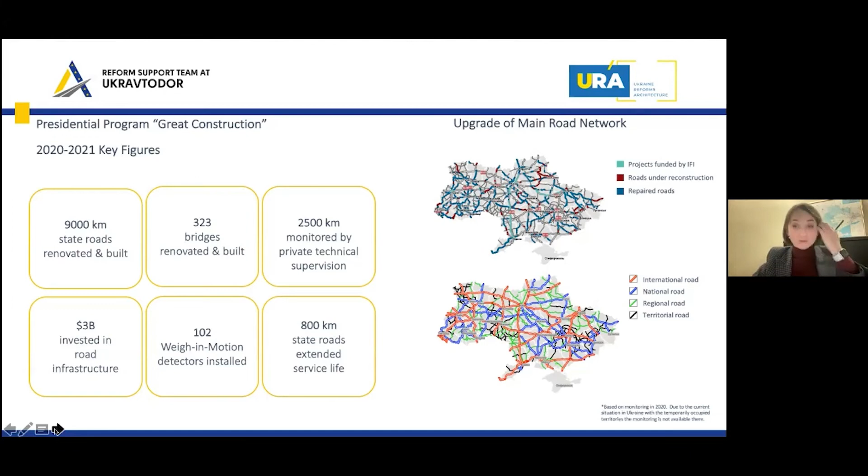First of all, we have understanding to realize these projects - we have a systematic approach and strategic goals for that. We have understanding that we need to reform the financing structure, and we need to work on the attraction of private funds into the sphere. And of course, at the moment when we started, we had nearly 95% of roads in bad condition.

After our hard work, we finalized renovations on 37% of the main road network, the principal roads. That means when we finish with our big, great construction project, the key question will be about road maintenance. It's an interesting question for all the road market players, because as they have big experience now working with construction, they need to remake their approaches.

The state needs to rethink its approaches to make sure that all those renovations will be safeguarded, and at the same time, the market will be as vivid as it was before.

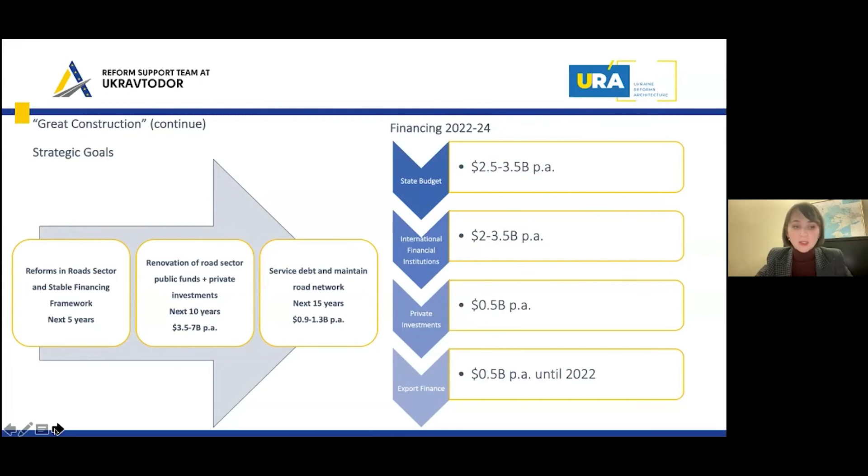So here are some numbers about big projects, and more importantly, information about the cooperation between our key partners such as EBRD, the European Bank for Reconstruction and Development, because as one of our investors, they help us to implement key reforms.

First, it's the anti-corruption action plan, so anti-corruption reform. Second, it's a reform oriented to infrastructure for e-vehicles, because at the moment, road repairs nearly do not consider the necessity for infrastructure for e-mobility. Then there's the procurement reform and the road safety reform.

Those reforms are implemented together with the biggest consultants of the EBRD. That's how we work: we analyze, then we prepare the gap analysis, and based on the gap analysis, we prepare the plans.

Here's a short slide dedicated to the anti-corruption action plan. Why is it important to talk about it? Because when we talk about maintenance or general construction works, it's not only about techniques and technologies. There are other colleagues much more experienced in this type of thing, because we're challenging those standards as well, but it's all about the effective use of public budgeting.

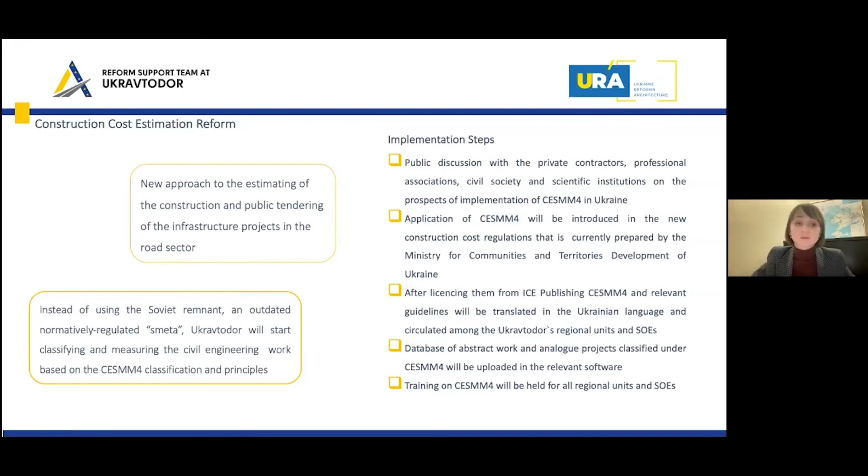It's important, and it will take some time to implement the reform at full scale, but it's important for us because it's already been nearly 2 years since we started this discussion about cost estimation with world market players, and they actually underlined that before we reform this system of cost estimation, they will not enter the market. At the moment, it's a huge step.

Road safety reform is more about standards, like traffic calming standards and bypass roads. Frankly speaking, we do have issues about this because Ukraine still has very high numbers of deaths on roads, and with all our renovations, we are trying to make them safer, more comfortable and predictable for users.

Still, it's a huge question, because for example if we're talking about winter maintenance—and it's winter outside here in Kiev—it's a huge question for all players to make everything safe and predictable. Just lately we had a big catastrophe where nearly 20 people died on the road. It was an international road, and it was an accident where we showed that the road was not a factor in the accident; it was more about regulations on passenger traffic.

Still, it's a huge issue because it's all about safety and the necessity to clean and maintain roads, to really think about roads as an asset. I think that's the biggest and most difficult question for general approaches in the road sector: to make sure that road agencies, special road agencies in regions, change their attitude towards roads and do not consider them just an object needing some works done, but consider them a road asset in which you need to invest, attract finances, and use them wisely, including such contracts as OPRC or others, which are rather new to the Ukrainian contract system.

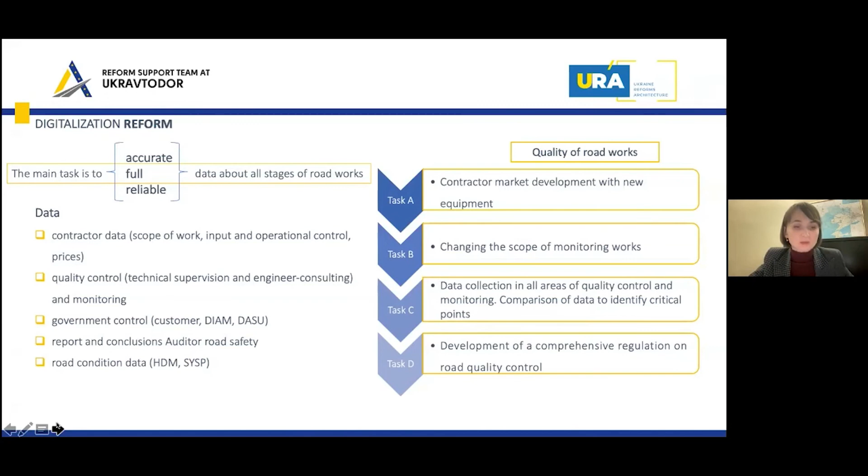I will not stop at the digitalization reform because other colleagues will talk about it in detail, but it's important because when we digitalize everything, it's easier to control and check all factors. For example, with the catastrophe we had this month, if we had already implemented the e-passenger system, that would help us work better with transporters and road users, making it a unique, general digitalized system providing as much data as possible to prevent such catastrophes.

Road maintenance data is important to our seminar topic. Data from vehicles and GPS navigators, which we implemented in 2019. Updating road passports with data on road maintenance works, which we're doing now. Planning maintenance based on instrumental data on road conditions. Contractors' e-office with 24/7 functionality. Traffic restrictions and emergency data based on user complaints. Planned and actual data on road works performance. That's the basis for a new approach to road maintenance based on end results, OPRC.

I'll share an important example of cooperation between the road agency and a navigator called Waze. A lot of users in Ukraine use it, first of all in the cities, but also outside. We established an automated system of exchange of information with this navigator. We can receive all data from the application, from drivers, and at the same time share push notifications and urgent notifications through the application from the road agency. It's not 100% automated - there are people sitting at computers sharing information, so there's still work to do. Still, it's a good example where something that already exists on the market, an application people use, is merged into the state system.

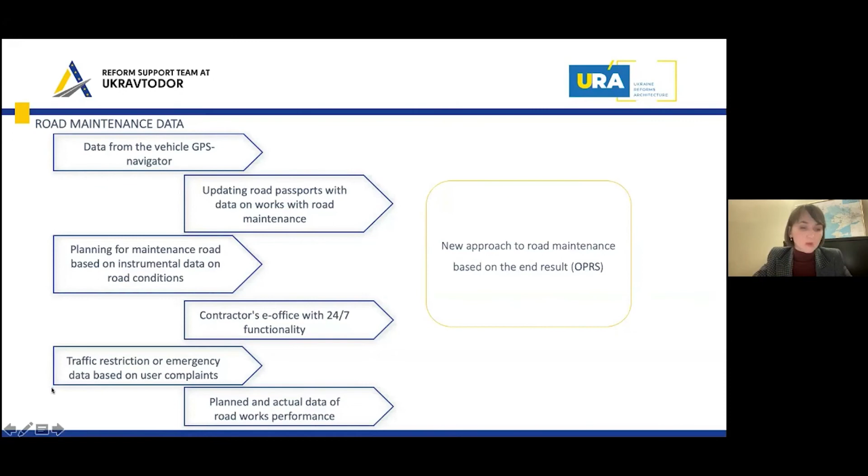We hope that with new data from vehicles working on maintenance projects during the winter, combined with other projects such as e-passenger, we will have an ecosystem where it is safe to share this information with respect to privacy, making the system predictable. Sorry if I jumped from topic to topic. I'll be ready to answer your questions, thank you for your attention.

From my side, I would like to share what has already been implemented and what is partially continuing to be implemented by Ukravtodor.

There is a united platform to collect all data that incorporates a wide spectrum of analytical instruments. This platform contains information about all contracts with subcontractors, current progress, and the possibility to track completion percentages within timescales like 1 day, 3 days, a week, several weeks, or a month. eRoad complements all stages of construction and maintenance of roads, from the idea of building or reconstructing a specific part of the road to the point of implementation and maintenance. Let me tell you about the key modules this platform is comprised of: a construction and repair module, a maintenance module, and a reporting and planning module.

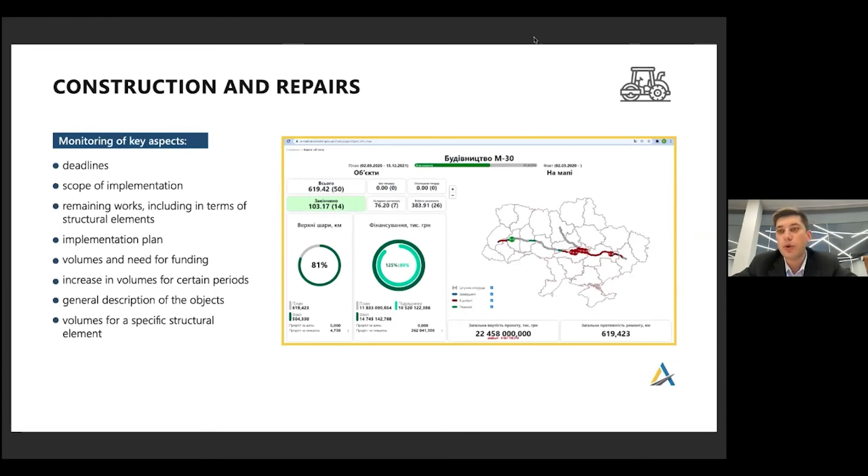The construction and repairs module helps us to control the volumes, the progress, and the remaining works to be done per object. On a daily basis, we see information being inputted on every type of works on a specific section of the road. These sections exist in different regions, and the information is being incorporated in a single project, as with M30, the road that unites several regions of Ukraine into a single project. We see the implementation for the project in general, as well as in detail all of the infrastructure objects located on the road - it can be a weighing station, an intersection, or a bridge. Every object has general information related to the project, as well as specific information related to the section: general description, type of works completed, type of works to be processed. This helps us to track the process in almost real time.

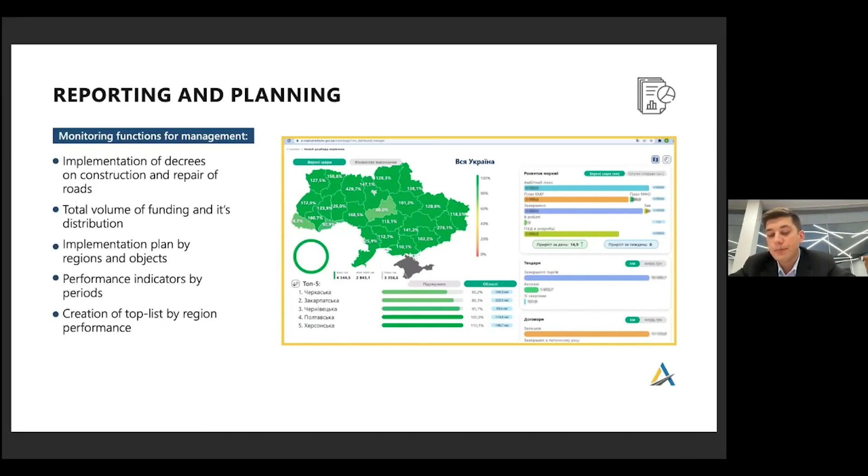Since the main load is related to construction and fixing of roads, we also pay attention to maintenance, and digitalization of road maintenance is in an active phase. We developed a maintenance module in our software that will track works related to maintenance and, based on instrumental data, will assign budgets to specific road sections. We'll monitor the movement of transportation vehicles related to winter maintenance, and we'll also collect data related to maintenance for further analysis and planning procedures.

So with regard to our plan for digitalization within our structure, let's see the next slide, please.

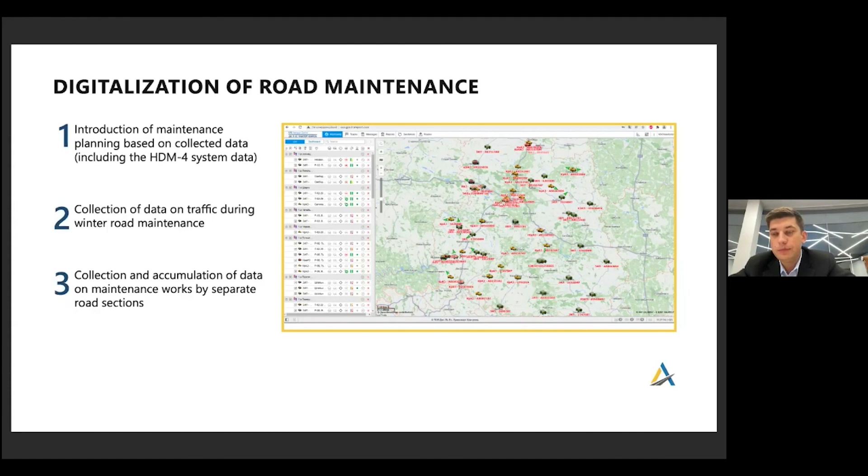What we'd like to build is automated bidding documentation, and develop an account for contractors and technical supervision so they can see field real-time information. We would like to build an information database, build a united contact center, and create a coordinated monitoring system for road machinery. Another initiative is to introduce a unified electronic documentation management system for our subcontracting businesses. We'd also like to develop a network of traffic monitoring stations to build heat maps of road traffic across Ukraine.

Thank you very much for your attention.

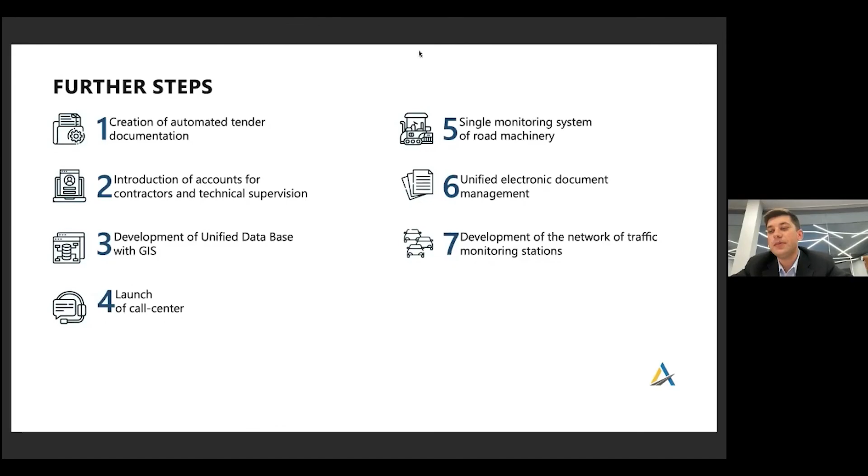Thank you very much for the presentation. There is one question, maybe for both of you who just spoke. I was interested - you spoke a lot about tenders and contractors, and I was wondering how long is a typical contract for road maintenance? Is it one season, one year, or longer, like 10 years, or somewhere in between?

Yes, as of today, there are long-term contracts that last as long as 3 years.